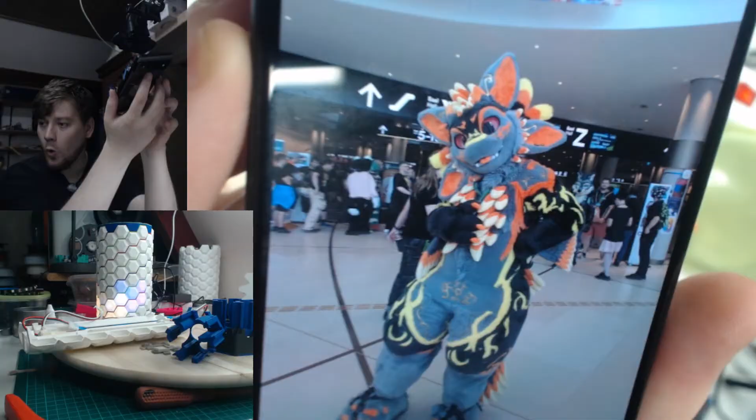But yeah, that was my Thursday, and Friday, Saturday, Sunday I was finalizing the build guide of the lamp and setting all that up. And insanity.

Just the insanity of doing all the things at the same time. I kind of realized that I needed to make a double check on all the files and all the models to check if everything is correct. And I almost re-uploaded it with the technical drawing timeline not fully drawn, so I missed a couple updates and I almost uploaded it in a bad state, and I spotted that. I was like, oh shit.

If I didn't do that change, there was a high chance that people could actually slice their fingers on the model, like I did myself. Parts were really sharp. I fixed it, but I didn't move the timeline from the CAD, so that update didn't apply yet. So I almost uploaded the model of the lamp in a sharp version that can really cut your skin.

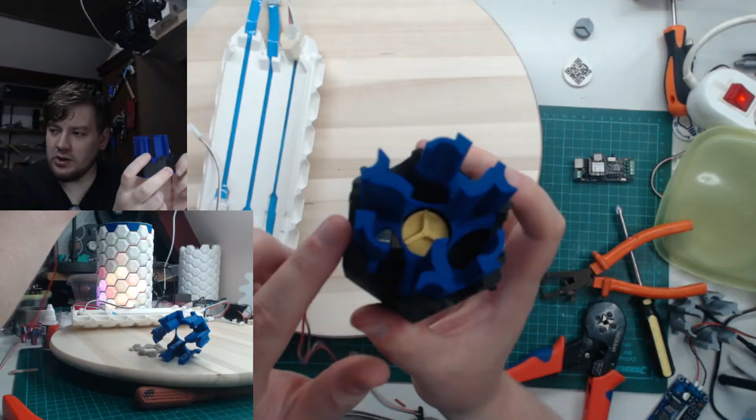I really want to work out, so the lamp probably gets some small adjustments and fine-tuning of the pictures for the stores. But I really want to fix this one, because the marble can still jam itself stuck, and I'm not fully happy about that. So how can I fix this? I'm not sure yet. The marble can jam in, and that's the part I'm still trying to figure out.

I went to Hamburg, to Eurofurence, I still don't know how to say it, and I met some really cool people, another set of crafting people there who have the knowledge I lack to make that thing. I think I'm going to try to make a furry glove with RGB LEDs in it, but first experience how to sew, how to take the steps of actually crafting, how can we combine fur with electronics. I know the guy I just showed did it, I know other people did it, but how can I make it in a way that is washable?

Because his glove cannot be washed anymore, the electronics and the fur are completely combined with each other. So I want to figure out a way, can I combine the first skin of the glove, get the electronics inside so I can just wash the fur, fully deep wash it to clean it up, and then technically skin it back on the glove. Those are not beginner skills. The things I want to do are not for a beginner, and I'm very much a beginner in that skill.

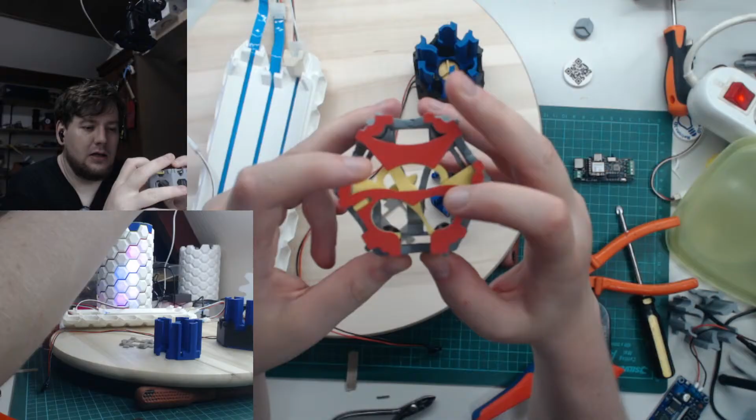Okay, this is an old version, so this one still gets stuck because this small tip was too big. So the marble, if it is centered up, do we have a marble here? Yeah, I have a marble here. So sometimes when you have two marbles in a chain, this one goes so fast that the first marble is locked in here, and then the second marble is stuck at the top.

And when this happens, now it doesn't work, because I've seen many times where two marbles get stuck and then you have a full jam, or it's so precise in the center that it jams up in here. I still need to fix this before I can fully publish

the marble contraption in this design. I'm still happy with it. I think I can put the base pieces live easily and people can have fun with it, but I'm still trying to find a couple tweaks.

Because one, it's very hard to see, so possibly this here. This has just slightly, it's slightly bouncy, because this plastic here is just slightly too thin. So can I make it thicker without it interrupting the dropping? That's the thing I kind of need to puzzle out in the next days.

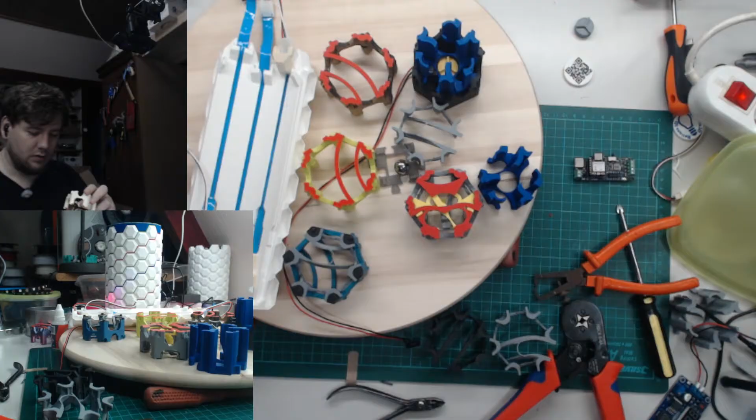So with the stopper you prevent the marble from going on top, so it stops in the highest position instead of launching off. The marble gets stopped in that area and drops straight down. So that's why there is that small stopping piece. And this works pretty good.

And I made it good enough that even when you have this one here, so you made, let's see, that one, yeah, that one is also okay, so this one should be like that, and we found that out.

Because even while this one is in here, the straight piece can still be used, the corner pieces can still be used, so that still all works. So that's the cool part of doing all that. So this piece doesn't really interrupt the flow.

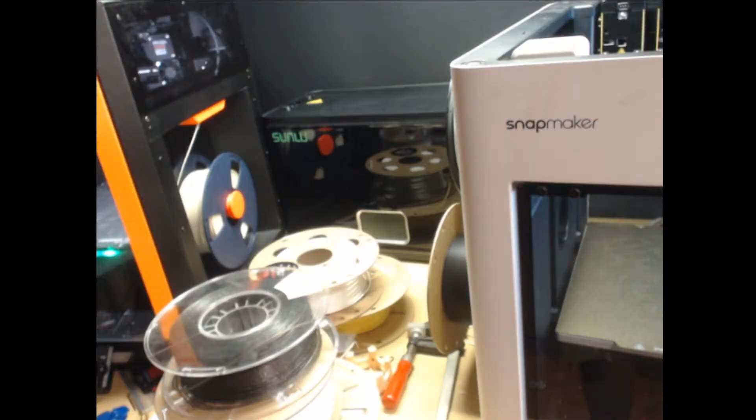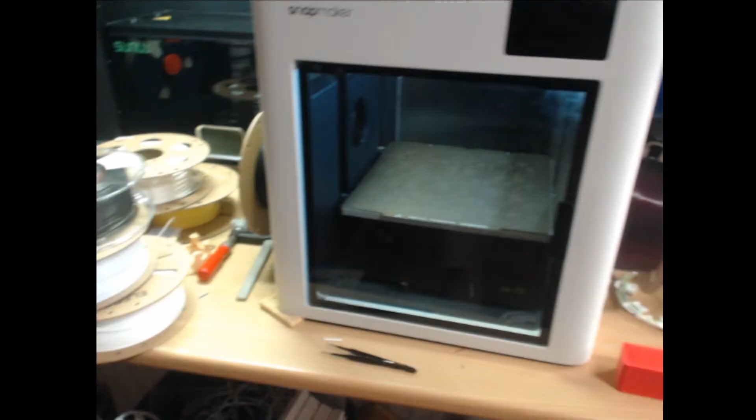I want to build that in 3 months, but budget wise, if the Lampic sells in a couple weeks 50 pieces, I can do the crafting of the fursuit, learning how to sew, all that directly, because then I can buy some equipment to actually start with all that. But oh boy, these are all very new skills, and I'm slightly scared. I'm really nervous for it.

But it's also a very exciting part, because if I can combine all that, I can combine it with 3D printing, I can combine it with electronics, I can combine it with RGB LEDs, and hopefully that's gonna look so badass. I have some ideas in my mind that I think are gonna work, but it needs physical testing and smaller chunks of the idea, breaking it down and doing all that. But if that is gonna work, it's gonna be so bloody awesome. They have stretchy fur, and I want to use that for the project and mechanical engineering.

Probably with the fursuits you need gluing and you need sewing. But I'm gonna try my best to not glue. Again, I am not willing to glue.

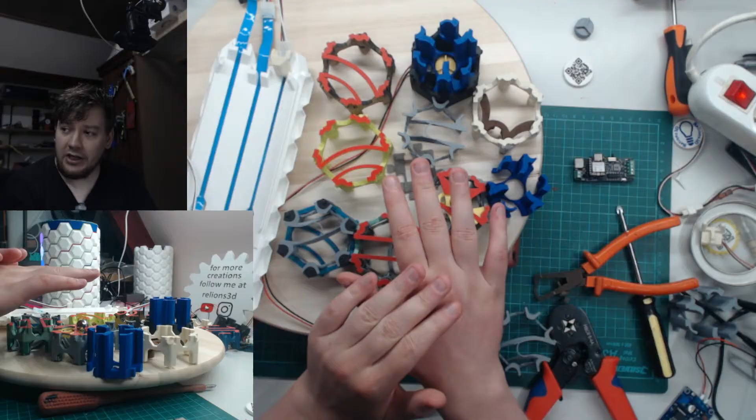So the idea is, if I can put my hand in the paw, in the glove - let's say glove, because paw still feels weird for me to say, and I don't pronounce paw that good, that everyone understands it - so if I want to make my glove, I need to make one layer where the electronics go in. Then I need to make another layer which I can put the fur on. If I can 3D print those two layers, I can click them on, that is fine, because then I can separate the fur part and actually properly clean it.

Fursuits get dirty, you need to clean that, and with electronics that's a very risky thing. So if it goes kablooey, I need to separate it anyway. So why not start with a design where the electronics is its own layer and the skin on top is another layer that can be detached from each other.

So there are a couple ways. Have a 3D printed base where the electronics lie in, and then a small 3D printed layer around it that I can just put on with TPU, and hopefully Tech foaming TPU, which is a little bit more stretchy, hopefully. But I need to test that.

Or the fabric, the fur, is just on itself, completely sewed together, and then technically you glue it on. But what if we don't glue it and use magnets? And use small 3D printed clips that I can put the fur on, click it on with a couple magnets in places so it is decently in place, locks in place, and then I can still separate it.

So if I can do that, which is gonna take some time and a lot of experience building up and skill issues, because I don't know what I'm doing, I just have the idea in my mind, I technically don't have to glue. At least that part. I probably need to glue a couple parts together because that is probably needed.

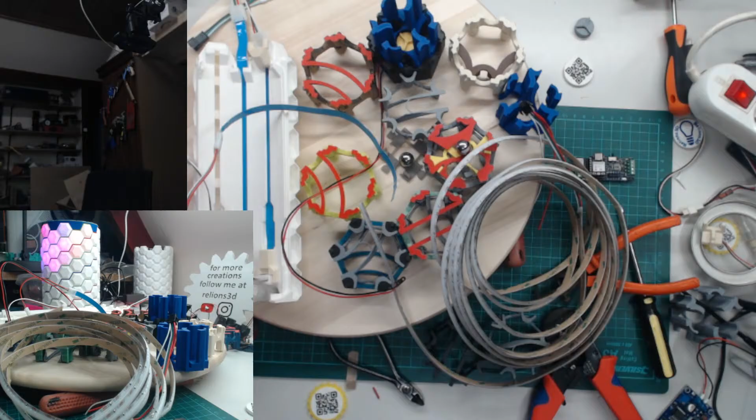This was the very first lamp, the very first design lamp that I made in this concept. This one has pogo pins on it, and as you can see on the bottom, it's all separately soldered. This is not fun, but let me try to do that. Can I put some light into it so people can actually see it? Can I put it here?

And this is just pogo pin hell, all connected up. I should not have done it in the back. I should not have done that.

This is where it started, the very first one is this one. And as you can see, it's a huge difference. This is the first one I made for someone who asked, hey, can you make me a hexagon lamp? Because I don't want to do it myself and gluing it on. And then I made this one - the camera cannot pick it up, it's already bloody dirty and the quality was not great and had infill problems. Then I designed this shape, and this one already, as you can see, it looks so much cleaner than the version one.

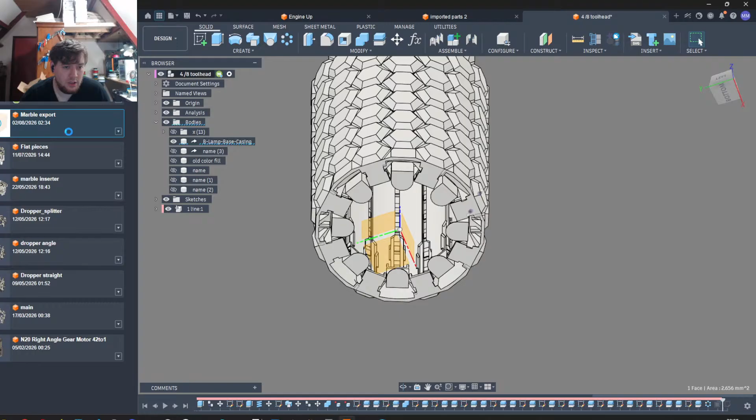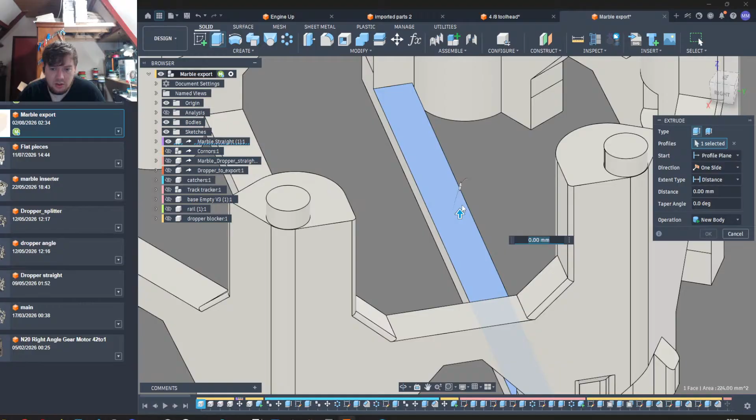But let's go to dropper, main, marble assemble, marble export, because I want to change something here. And that's the tracker, base empty, doesn't need it. So can I make it a little bit stronger? So can I, because if I do this, I just make it thicker, and that's not what I want.

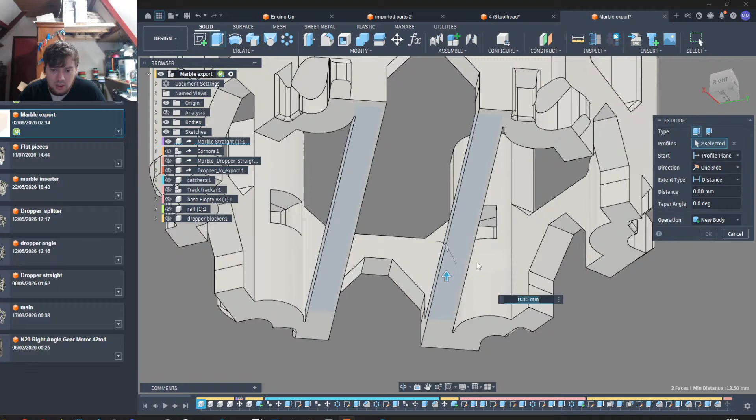But this is not what you want either. So if I say, what is the total value? So this is, no, this one and this one. How thick is this? So if we go plus 2, plus 2, we're gonna make it twice as thick, but we're gonna do 2 small chamfers because we don't want to go straight, we're gonna go angled. So hopefully that small ridge of edge of plastic, like that, do not want to have sharp. So 1.6 because I want a 0.4 line here, 0.8, so this is 2 lines of plastic. And I think this will work.

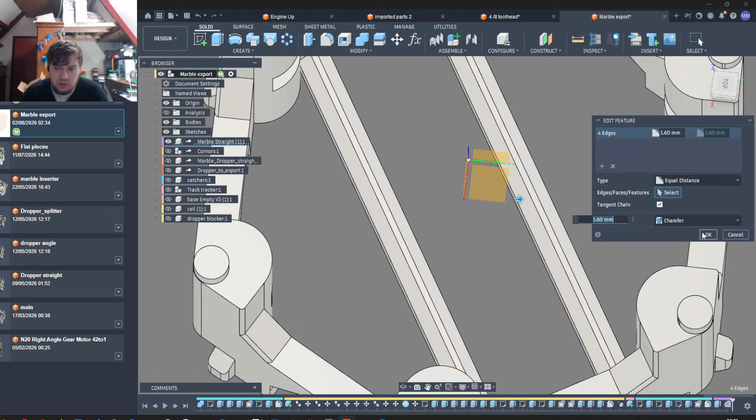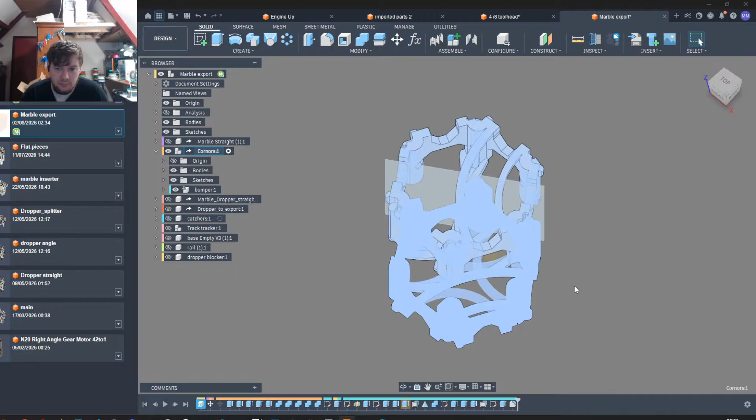So hopefully I can make it strong enough that the piece doesn't go flat down. And this angle should not hit the marble when it goes down. So I want to print this one and I'm gonna add a corner piece. So let's remove this one. A couple are flat now, that is not good. This is bumper, okay, there.

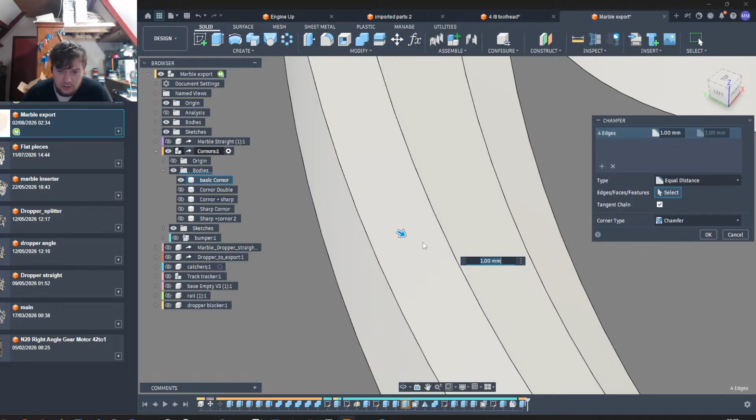2 up, so we create a little bit more thickness. And chamfer it down to 1.8 or 1.6. I forgot that, so let's see. I think it was 1.6. So... We have a slight problem here. What is going on here? Something is not correct. Huh?

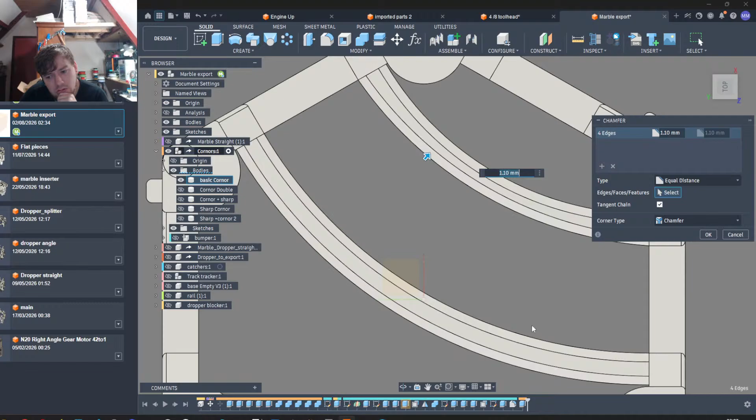This one is correct, this one isn't. I made a mistake. Oh, I made a design mistake. Okay. Yeah. Yeah, oh crap, okay, is this the only one or...

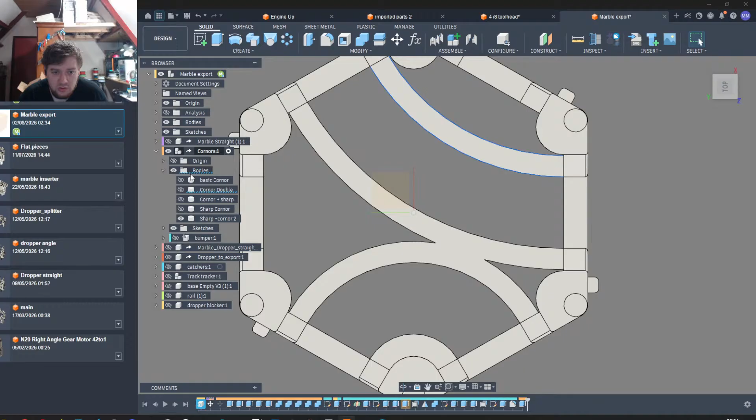Okay, this looks okay, so this is 4 and 4. So if the radius is 4, this is also 4, so this one is fine. Corner sharp, this is fine, this looks fine, this is all fine. Yes, sharp corner, this is also fine, sharp corner too. This looks fine, so it's literally the basic corner.

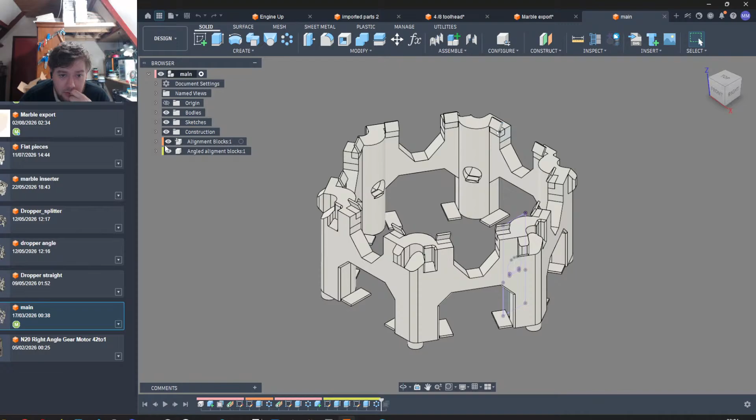Oh boy. Oh boy. Nope, not this one. Dropper angle, dropper splitter, marble splitters, flat pieces. Should be hidden here, so now we're going back because I have an export file while I do final tweaks, and I have main bodies in different files so it doesn't overload. So I already see this mistake here, and we somehow...

Okay, so both are the mistakes here. Corners, bodies, basic corner. So let's go into this file and see where we made this. So I tried to do something here for a thicker thing, so that should be... Bumper should be gone, that is bumper.

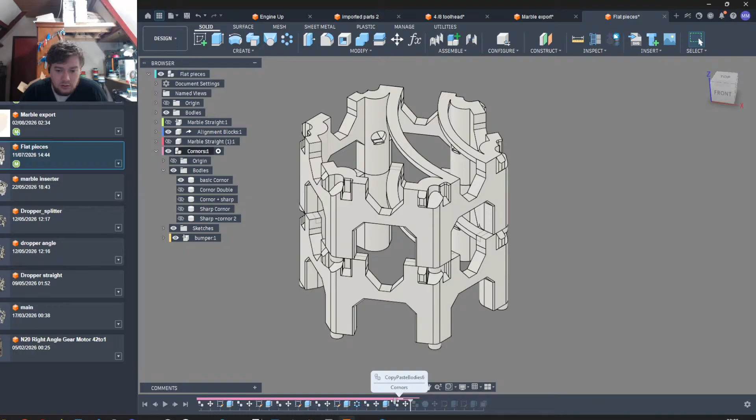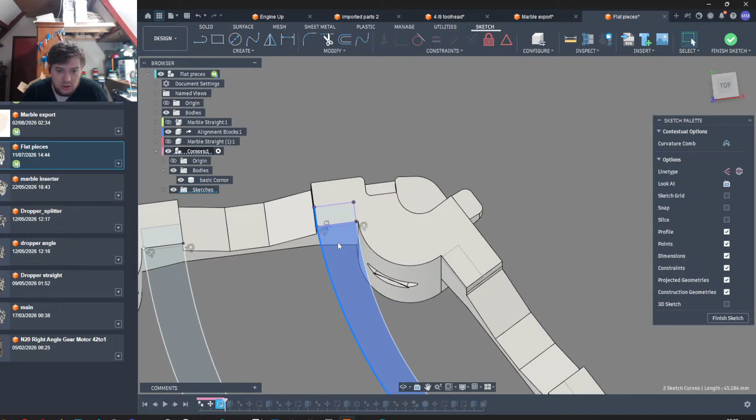Okay, we still have the mistake here, so now we just can keep going and going. There we go, okay, now we found the sketch. Now we do this, that is that one, and this one is not correct. And this one should be.

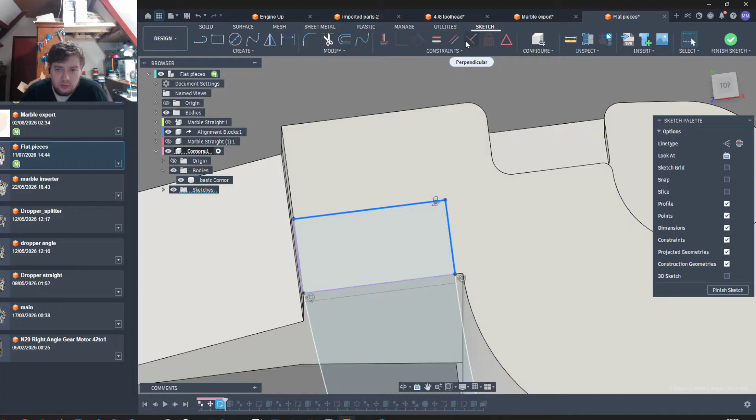But why is this and this not correct? Nope, that is also correct. This one and this one is correct. Why are you not correct, huh?

Which one is it? Because, like, I'm gonna remove you and see how you react without you.

I think that's the fix. Found the fix, oh thank God. I do my best to put everything now in separate components so you have a small timeline so you can actually see where your problem is. So now we can all extend it to here.

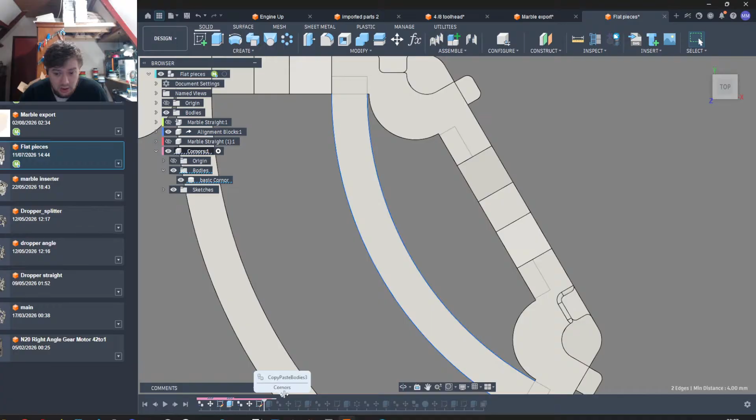Hit save here, it's saved. Now it's uploading the progress. It'll take some time, come on, you can do it, Fusion. Upload it and then give it to me. Come on, there we go. Now we go here and now I click here.

Components out of date, so I now click update. And then we should see this updating. Now it's calculating, calculating, calculating, doing all the actions again. And then this, bloop. Hey, we fixed the model, and maybe.

I never noticed that, I have printed so many mistakes. Oh bloody hell! All my single colors, all my single corners are not correctly printed.

Oh, that gets me so salty. They work, but that's why the marble was not correct. That's why.

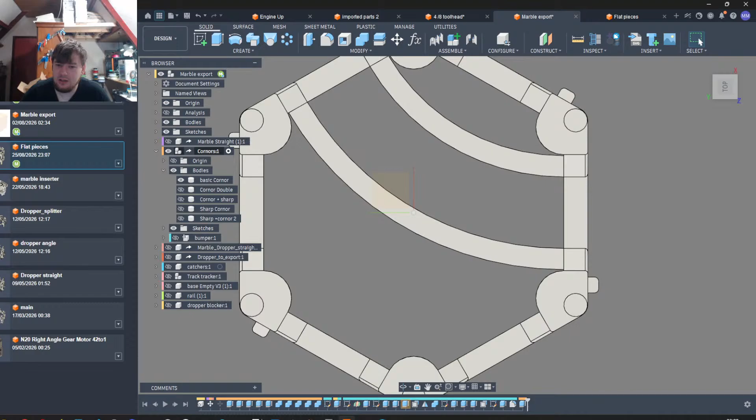No, I fixed it properly this time, so not fixing it and doing it later, but in the actual timeline, so everything else that touches it is updated.

Oh, I feel so salty about that. Oh, I feel really salty about that. Ow, ouch. I have printed around 400 corners, like probably 200 corners just like this one, so I printed 400 of these pieces, all wrong, and I never noticed.

Now I look at it and I see it directly, but I never noticed. That really affects why the marble is getting stuck. So this is like, I have seen the marble getting stuck so many times. I have seen it and never actually realized it.

It always gets stuck here because there is more space in the center, so it doesn't matter where you go, it will center up. In an actual double corner, if I have one, I'm like, yeah, this one is bad, this one is bad. And with the double corner, I didn't do that.

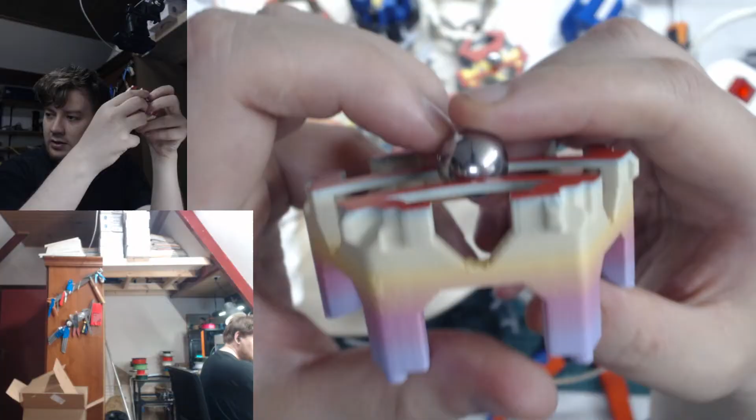So this one just keeps going and just stops where it stops. But the moment I do that here, it literally stops here because the ball needs more energy to actually roll up again, because it's slowly going down. That's why everything is stopping.

Oh, I'm so bloody pissed. I am... Oh, this is such a disappointment. I am pretty mad at myself that I have not actually seen it once. I have not actually seen it once. I have not ever seen this once. Well, I have seen the marble getting stuck, seen the marble getting slowed up, and I couldn't puzzle out why, because I just didn't realize that this small piece was slightly smaller.

And this is why I triple check.

Hey Mega Ape Lord, I have not seen you yet. Did we meet at one of the events?

And lurking is appreciated. Like, I'm just realizing that this piece is wrong. I've printed 400 of these pieces, 400 corners that are now technically never working.

Yeah, that haha is completely, yeah. Oh, I feel so silly. I feel really silly about this, but welcome to testing.

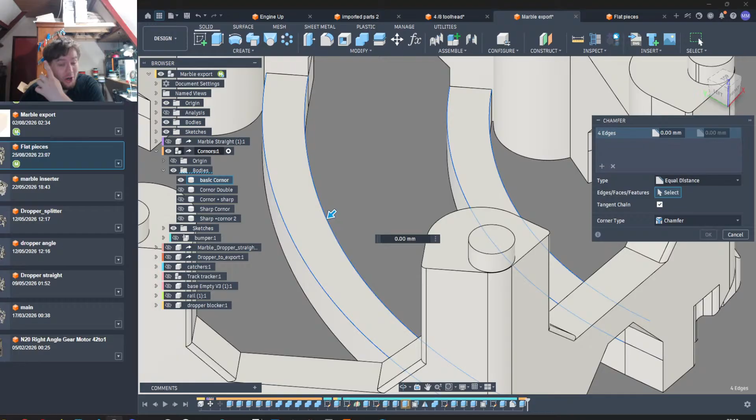So I'm reinforcing my marble contraption, and I need to switch camera. There we go, I forgot to switch my camera. I do that so many times. Sorry. Alright, so this whole jam started because, like,

I saw that this was not lining up. It was not how it looks like this. It was being slightly curved, and this was just disappearing because the edges were not the same.

We found the problem. We went back in the timeline, we went fixing it where it should be fixed and not fixing it right now, but keeping the fix in the timeline. Welcome to CAD programming or CAD designing. You can fix it in the past and then update it to the whole timeline, so everything else is quality approved.

Oh man, I'm so sad that I just now found that out. Printing 400 corners, printing 400 corners.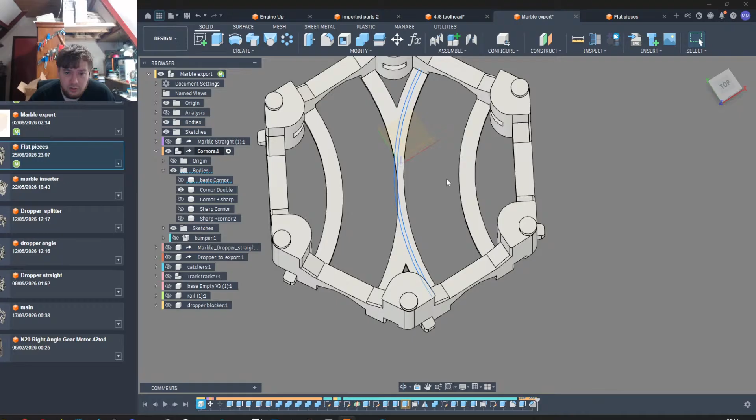Oh, that still hurts. Okay, so we have the basic corner now. We have corner double, and this one's gonna be a little bit more spicy because of the center one.

We're first gonna do those two. Let's see how we can do this. So press pull 2 up, and do not want to do that one yet.

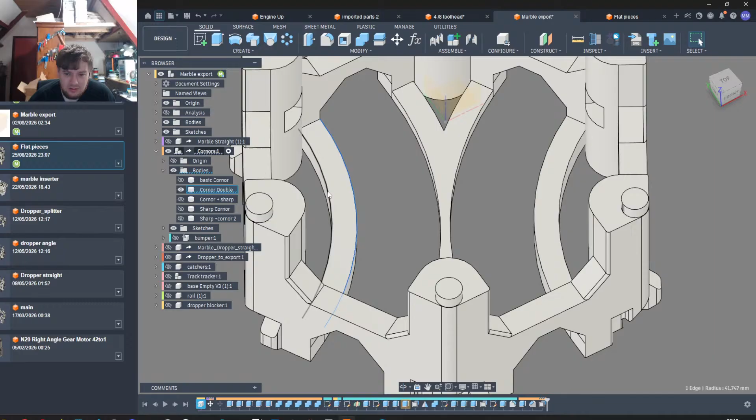So let's first get the basic pieces out, do a chamfer. Go to 1.6 because then this edge is 2 lines of 0.8.

But how do we do this one? Because if I do just 2 up and then I do chamfer, this is gonna look very weird.

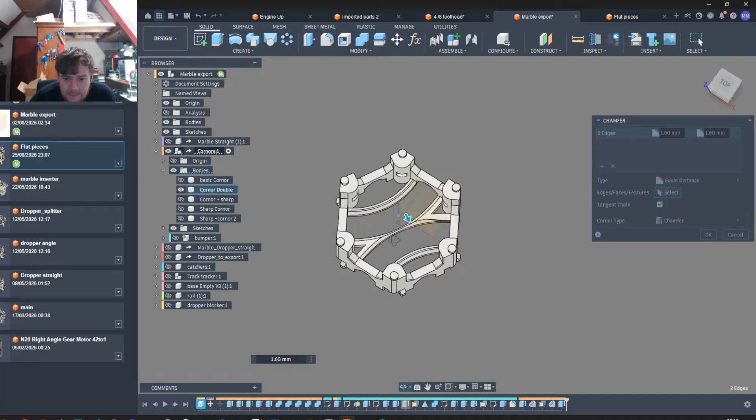And yeah, there we go. Why are you not correct? We have a small tiny edge here because I can see that this is blue, but at the same time, yeah, about that.

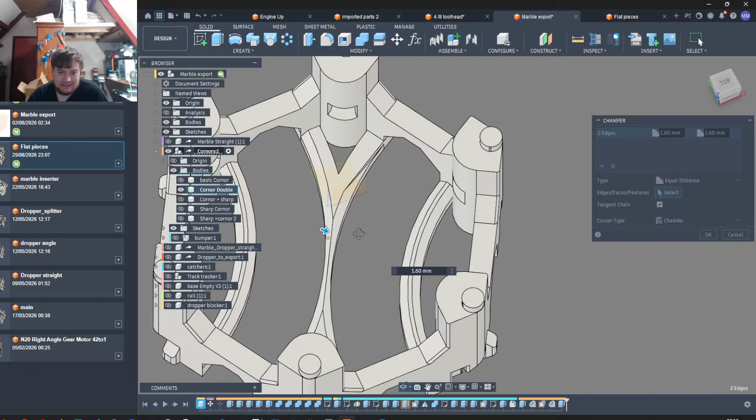How can we properly make this a little bit higher but not get this problem? Because I dislike doing this, I also dislike doing this. So let's go down again.

Let's make a sketch where we're just gonna remove the center and see if we can make it in a better way.

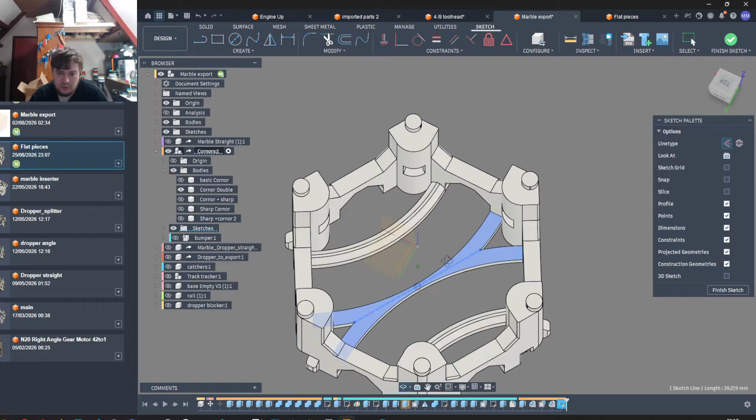How can we do that? Okay, first get a line all the way to the center, to the other side, so we have a 100% lined up piece. Then we just do this one, and then we perpendicular line it up with this.

Then we say we're gonna constrain this one to here and this one to here, so now we can drag it and it's always centered.

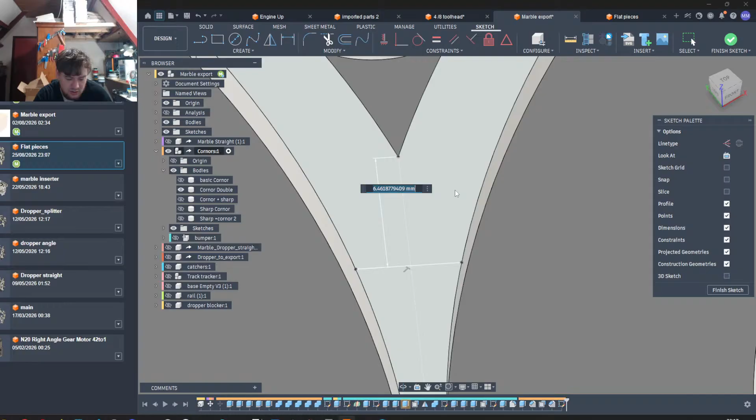Then we grab this distance and I'm gonna say 6.5 for now. Oh, that's not that. 6.5, not 65, that's way too long. So let's see if this works.

Let's create a center point so we can actually mirror this line, and hopefully that goes correctly, because mirroring this kind of stuff always goes wrong. So let's see if we can break it.

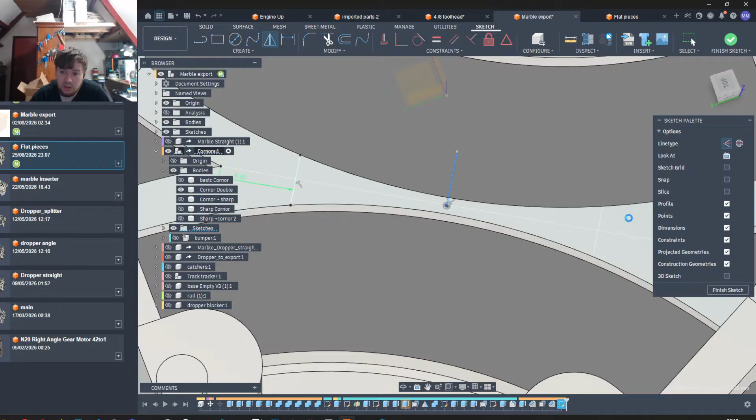So this one goes here, and oh, this one goes nice. All right.

Now we go up by 2, and let's see if these mistakes happen again. See, and now it goes correct. Okay, now it goes correct.

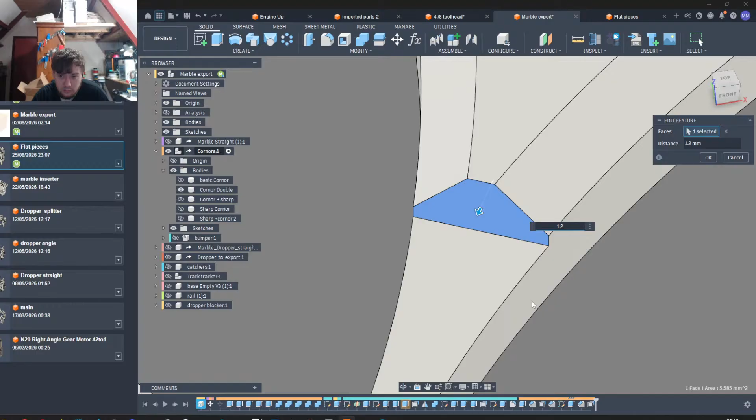And then 1.6, and 1.6. And now we can press pull this a little bit more, 1 millimeter, so this should be 0.8. A little bit more, 1.2. Yeah, okay, so that press pull is fine.

And this one should be 1.2, so that gets you close to 0.8, which means 2 plastic lines - 1 plastic line goes on the outside and then 1 on the inside, so you don't get a weird infill there.

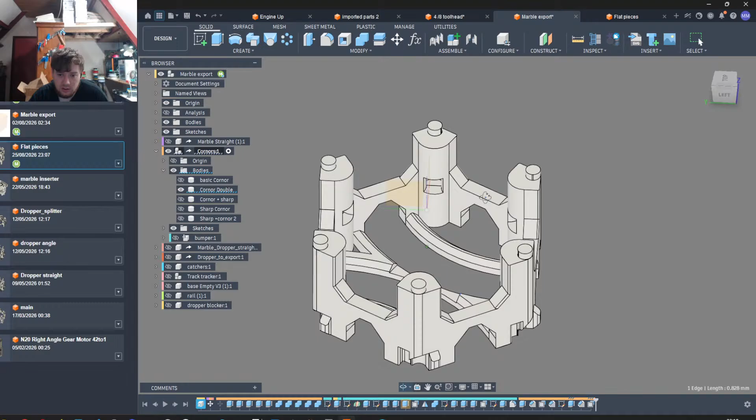And I think this is decently reinforced, a lot better than before, so it is less bulgy. I'm sad that this looks like this, I kind of want to close it off, but yeah, how do we do that?

Claude, can you not update yourself while I'm streaming? Thank you, that was silly. You are being silly, silly AI. Can you not do that? Thank you.

Oh yeah, okay, so can we make this a little bit cleaner? Because if I do press pull more, it just goes down like this, and yeah, this is not what you want. Can I do a chamfer here?

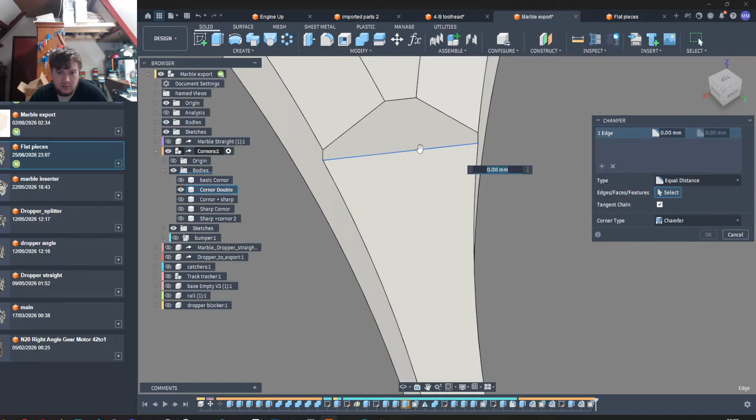And then just do that, yeah, I can work with that one. Then I can make it a little bit farther. So if we go to 2 distances and just try to stretch this one out a little bit farther so the lining goes better.

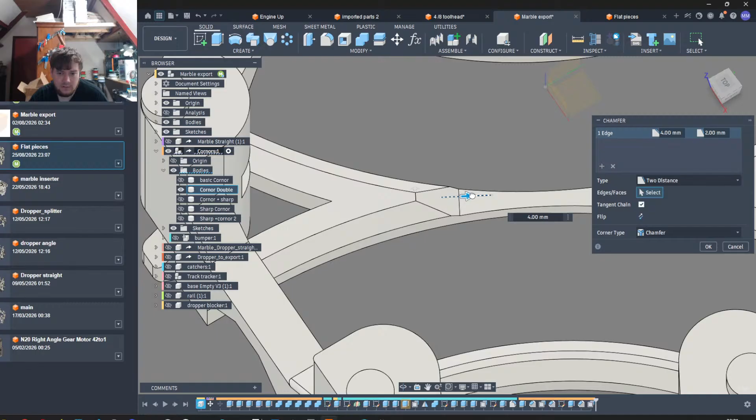Okay, I think this feels good. So this feels a little bit stronger, it extends the bridging a little bit more, so you get that point of getting the support in. And I think visually it still looks decent, yeah okay, this looks better.

So yeah, okay, I'm gonna try this one. Let's go to corner sharp now. This is gonna be not a problem, and this is fixable. All right, so first do the easy one.

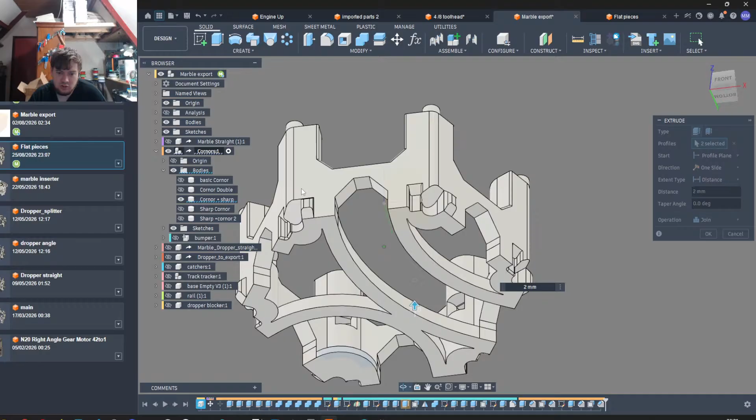Let's do it step by step, let's go 2 up. I think this one goes at the same time. Yes, this one is not needed because this is already strong enough. Let's just add more strength, just add more strength, just so it never can falter.

This one is really hard, so that should be fine, right? Yeah, it should be fine. Okay, that one.

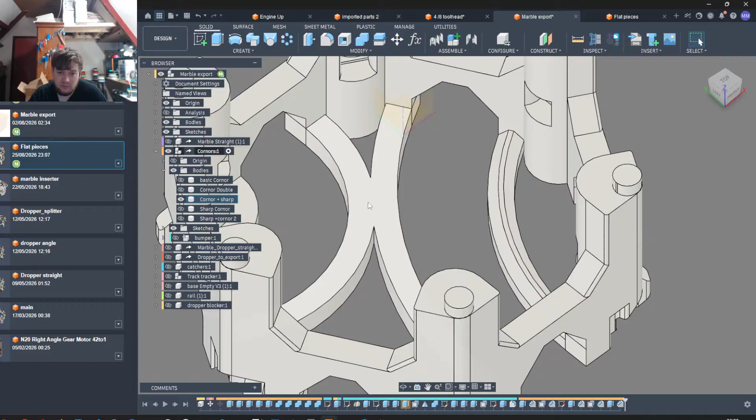Okay, and I need specifically this one. So this one and this one are also needed, and then it doesn't work. We need to check that one carefully separated, so let's do this one first and then see what happens.

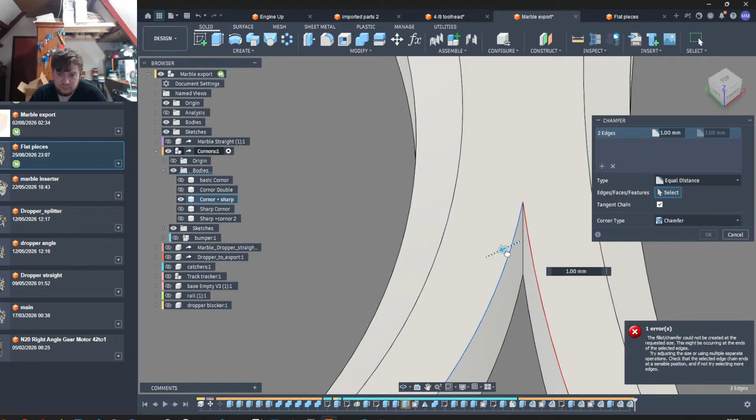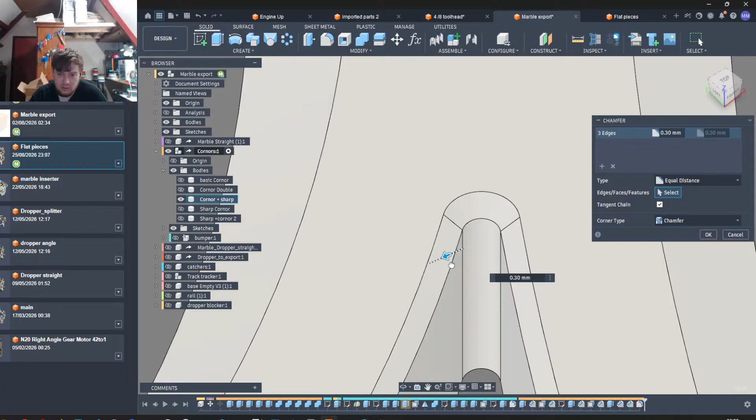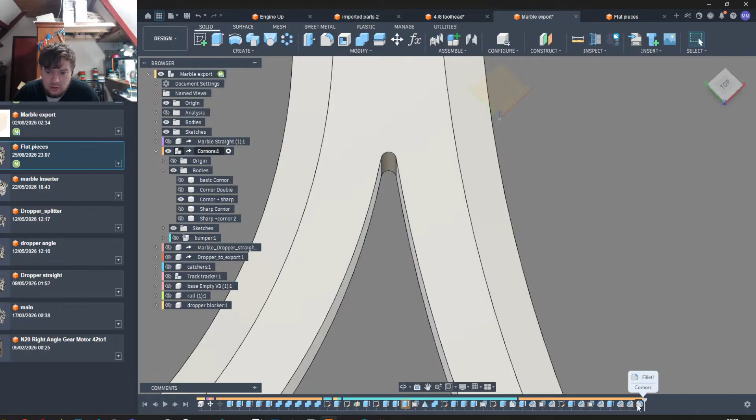Okay, let's see how small we can. Huh? Wait, I did chamfer. Why didn't it do the chamfer? Okay, that was weird.

Okay, do I want to accept this? Yeah, I need to accept this. So this chamfer is a fillet of 0.25 because we have this one now.

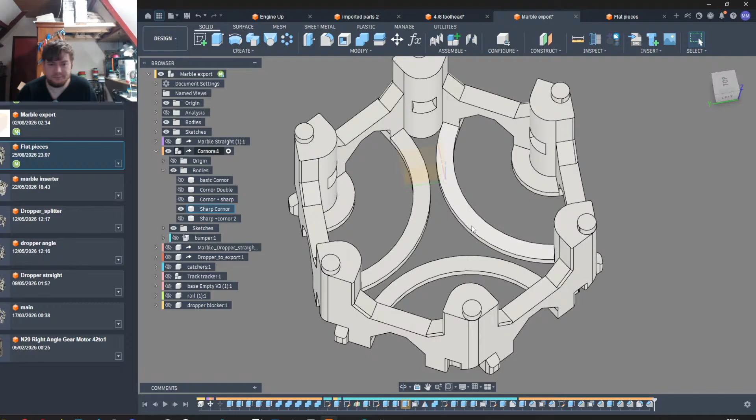That's gonna hopefully look cool, but at the same time... okay, now we need to do this one. So that is this, and this. Go up by 2, let's bring up those two. I do this specifically for the bridging itself, and I can make this one as thick as this now, because there's no way, like, I make the edge so it can drop, but there is no dropper here.

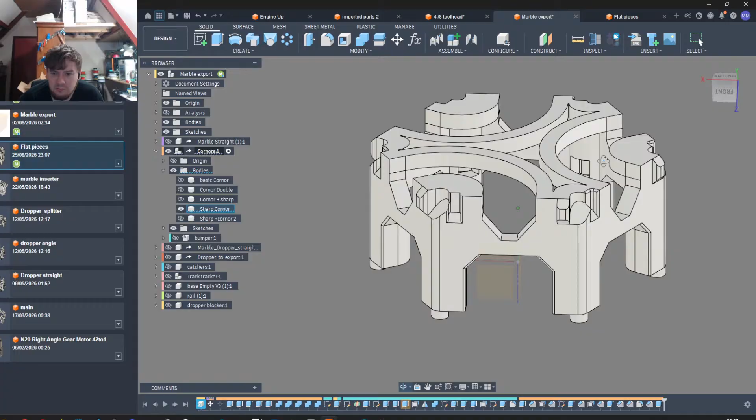But at the same time, making it look different feels weird, so I prefer to do just the chamfer so it all looks the same. Well, the purpose of this chamfer is that the marble can go under it. This piece doesn't have a dropper capability.

Oh boy. But it still consistently looks the same. Do I really need to do this then too? What do you guys think? Do I need to make the outsides also like this? I think I need to do this. This looks better, yeah, then everything is consistent. And everything is consistent, so we have all those pieces.

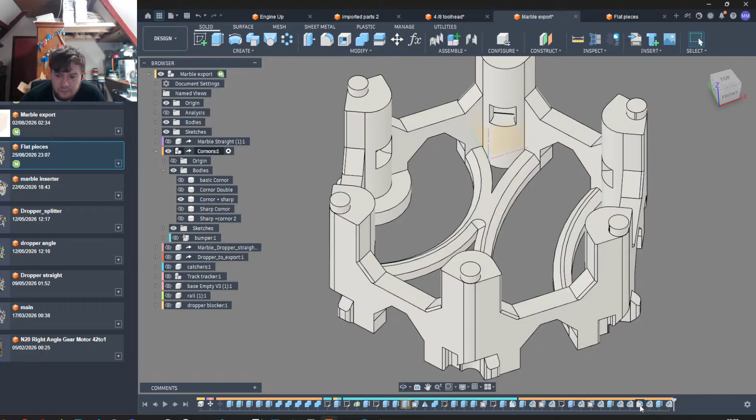So let's go back to that one. Make things look consistent. Do I need to do that one too? Yeah.

This one is for strength. This one is needed because the marble can go down here, so I think this makes the pieces a lot stronger, and that's the good goal that happens, because I see there is some small wiggle, and even with this double structure, it can still slowly bend a little bit. So hopefully with a couple edges more, so 2 millimeters, so that is...

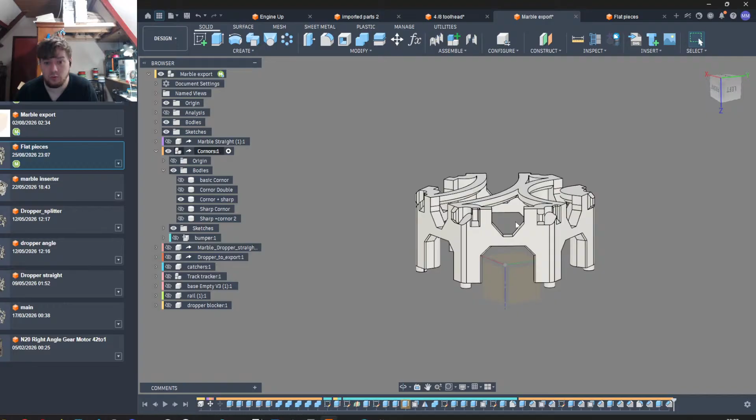5. It is 10 extra layers, so hopefully with the 10 extra layers there's enough strength that it never even slightly bounces down. So hopefully it works. Gotta make some test prints, so when this one is done, this one is left.

So now we're gonna do this one again. Let's go here, you fillet. 0, 0, 2, 5. And let's go to the bottom, do 2 extrudes again, let's go down that.

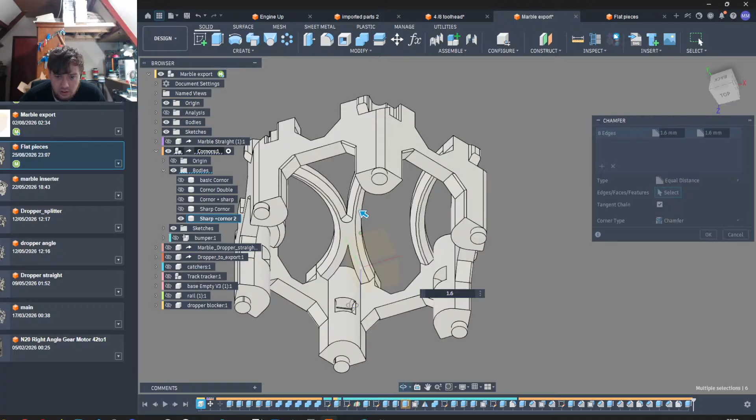And let's grab them. Chamfer, chamfer, chamfer, chamfer, and chamfer, and chamfer. So 1.6. And all that now looks the same. Nice. Do not forget a corner. I'm not forgetting a corner.

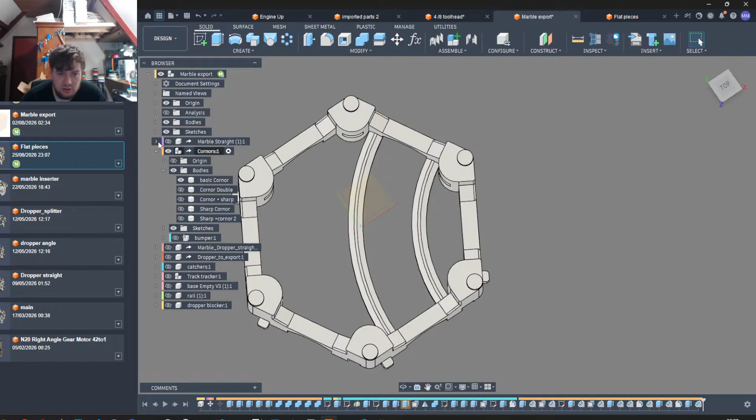Alright, so double check, is this one okay? Yes, yes, this one is okay. Yes, this one is okay. Yes, this one is okay. Yes. Alright, then there's all the pieces. We have the basic corner and we also have the straight. So let's get straight and body up here too.

Save mesh. Now we're gonna not print it in the Bambu Lab. I do not want to do it in the Bambu Lab, so let's go to testing because this is a lot easier. So save, save, basic corner, save them all separately. Yep.

Okay, now I'm gonna do it like this, so everything is lined up, everything is lined up. I only have that open. Let's just do an export, way easier. Export. Testing, marble export, new flat pieces. Export.

Do I have enough plastic on the core 1? I kind of want to print it on the U1, so let's make some blue ones. Yeah, we're going for blue. I want to do it on the U1, so let's move it up to the U1. That's a lot easier because that's where I have all the quality, since the core 1 has trouble with this system here, so I need to debug that one. So let's go to the U1 slicer.

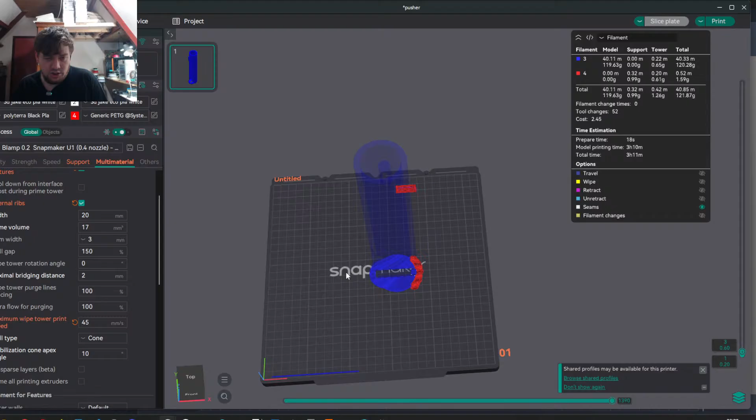I need to go to this one. Prepare and supports, disable supports, lamp settings, that is fine. Okay, cool, you are gone. Let's get to testing.

Let's do that. Yeah, okay, cool. Split them all up, there we go. Okay, let's do a slice and see how it looks. Let's see how this looks.

Oh, okay, now I think my sugar is crashing down. No, still not, oh bloody hell. Okay, so this is slightly higher than expected, but this line looks better. Slightly sad about this one, but cannot help it. I'm slightly annoyed that this doesn't work like it should work anymore.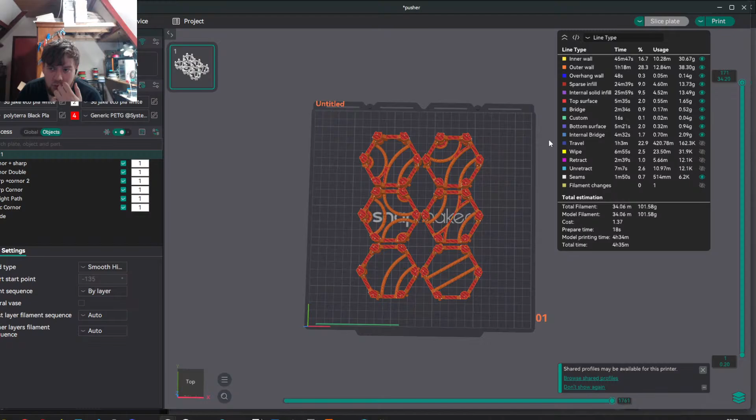Okay, I want to test something. Let's put you on a separate plate and do one solo slice. This should be 45 minutes. Okay, it adds 1 minute. I cannot complain.

Oh, I'm making a very big mistake here. Oh, ouch, oh, I cannot do this. Oh, I did not realize that one. Oh, whoa, whoa, whoa, whoa.

Where is it? Crap. Alright, I think it is downstairs, it's probably downstairs. Okay, I need to grab that, because if this doesn't work, I need to grab the tool, so give me a moment to find it. I need to find that tool. Oh, crap.

I almost made a mistake. I'm gonna go robotic, I don't care. Blah, blah, blah, blah. Where's the tool? Where's the tool? There's the tool.

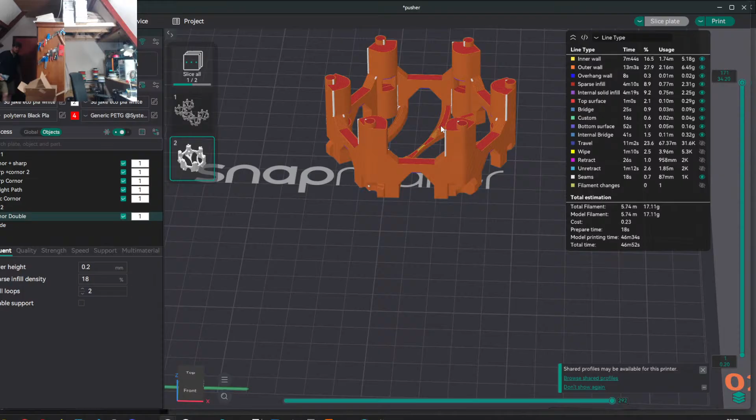Alright. Voice is slowly coming back and the robot quality is gone. Alright, so let's see which mistake I almost made.

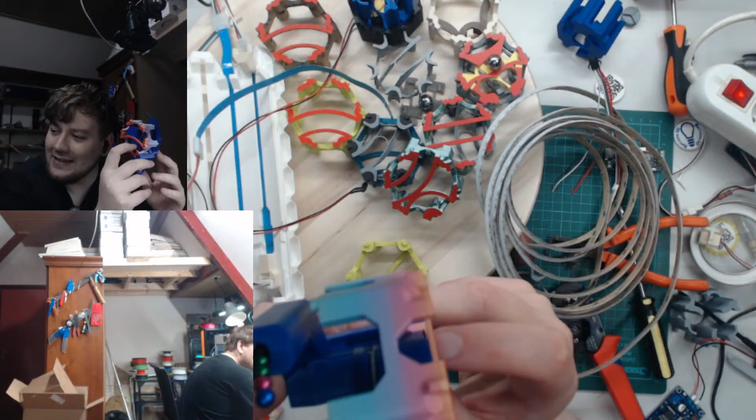Like, because here's the thing. This tool you insert in here. I'm pretty sure that this space, oh, come on.

Yeah, like it. Focus. But yeah, that space is a lot smaller than 2 millimeters. So if I printed those pieces...

This doesn't work anymore. Can I make this slightly smaller? Yeah, I think I can make this one slightly smaller. Okay, this needs slightly more work, so I need to redesign this one too, so that it fits on the new design. So, glad I thought about that.

So I will start the print anyway, and test if the thickness feels better for rigidity of the marble, so it doesn't slip down and is more rigid, and doesn't do the things I don't want it to do. If that works, that's the new version.

I need to adjust this one, because if I forget to adjust this, then people pay 15 euros for this and then it doesn't work on the new design. I almost forgot that, like I didn't think about that one, huh?

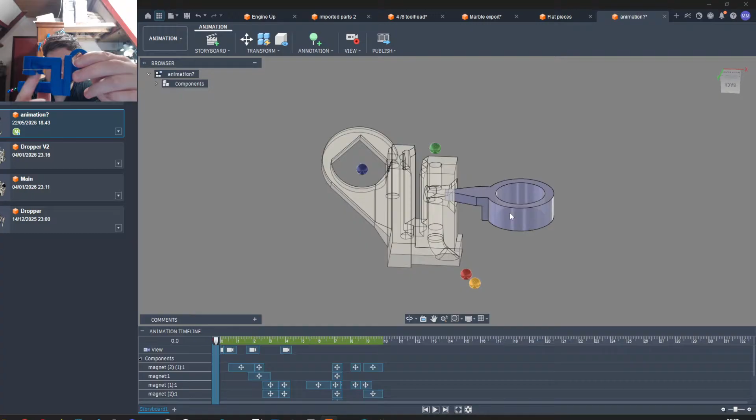So the moment that happens, you see that this magnet here is inserted, the green one is inserted, and this is the canister line. So the moment this happens, you push the piece in, you click it in.

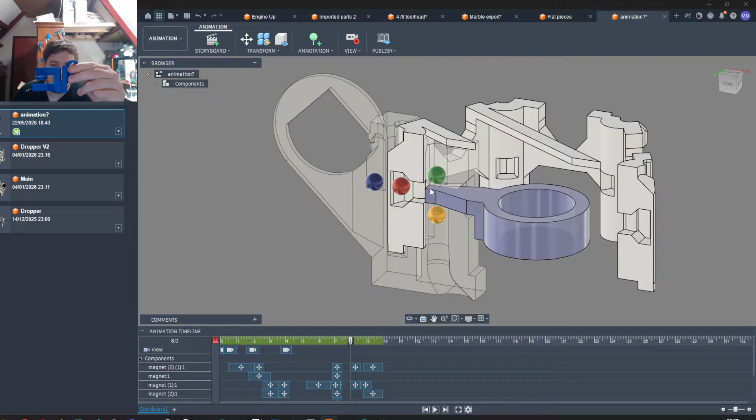This magnet holds in place so it never comes back. Going back to the design and checking here really fast, let's do an inspect. You see in section analysis that this is slightly smaller than the marble, so the marble pushes through because you push it in with the tool. Then this small plastic just goes a little bit wider and pops back.

So that's why the magnet stays in place. But by doing that, and doing this small magnet here - a lot of people see this magnet here - this holds the chain. The moment you release it, the next marble pops into place so you can do the pushing again. This magnet guarantees that this one never gets attracted to the green or the yellow one.

That's the things I came up with, because I noticed that sometimes you get a jam, and then the marble, when you want to push it out, is stuck here. And then you can never get it out because it's all locked in place, because these two keep the magnet here, and then you need to wiggle it down in half, and you cannot push this one in because you moved this and now it's stuck because this one is higher. That's why I designed it with 3 extra magnets. But all the magnets are the same, so the only thing you need for this system is a small elastic band.

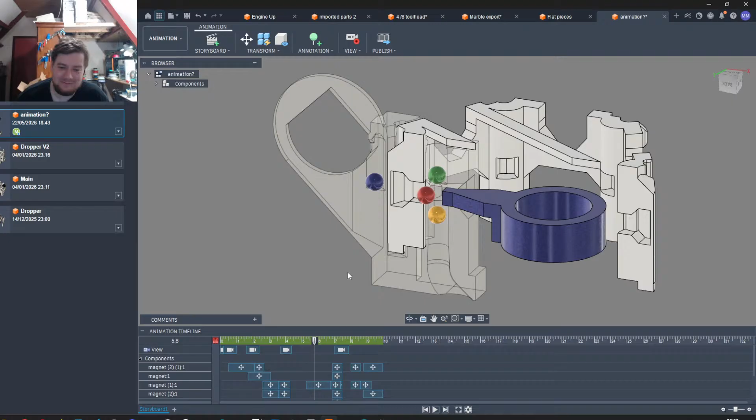That's small technical stuff that I like, but this one is really hard to show on events because someone explained, like, how can you do this? Can you give me one? And I was searching for an empty one, I couldn't, and he just couldn't see because there's a small magnet in here - it's really hard to see, I cannot even see my own camera. So that small piece there is where you click it in, and then this one gets clicked in. This one is very easy to spot.

That makes it so you can keep loading, so you can always get the magnet in here and do that effect. And then it just keeps going because the weight of these magnets, they just fall down and do that. And now it's stuck - there was no piece in here. There we go, putting it back.

So it's decently easy to reset, but this is 15 euros or $15 in value cost, because I put a lot of time into this one too. But at the same time, there is a free one that is fully manual, while this one is more automatic and lined up for a bigger canister.

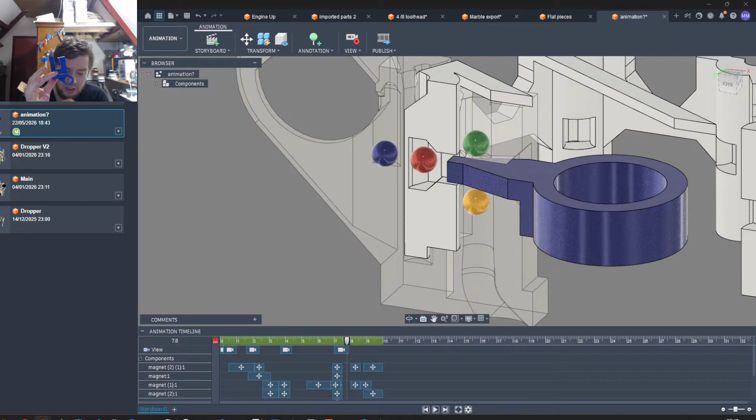Design details - why I do things and take the steps to understand I want to do things slightly better, and I just do not want to trash it away, sell it, or put it live with half effort. That's why things take me a little bit longer, because I really do my best to make a product that works out of the box better than... how can you say that... okay, I want to make my products better than a game on launch date, because as you can see, current games in this age are all just beta versions. We buy the games, then we test it, then we complain, and then they maybe fix it. Because if we don't complain, the game company doesn't want to fix it, because why fix something no one is complaining about?

That's why you get so many bad games - part of it. There are other reasons too: everything is rushed, and all the investors are complaining because they want more money, and every game company needs to extract money from us gamers. But a core part of it is that as long as no one is complaining, why bring out a good game? That's a mindset I disagree with. I want to give a good product, doesn't matter if it is good or bad - I want my thing to be my standard. That's what I want to try.

Yay! Oh man, I get so easily distracted the last few days. I'm slightly tired, guys - only slightly tired. But let's put this one back.

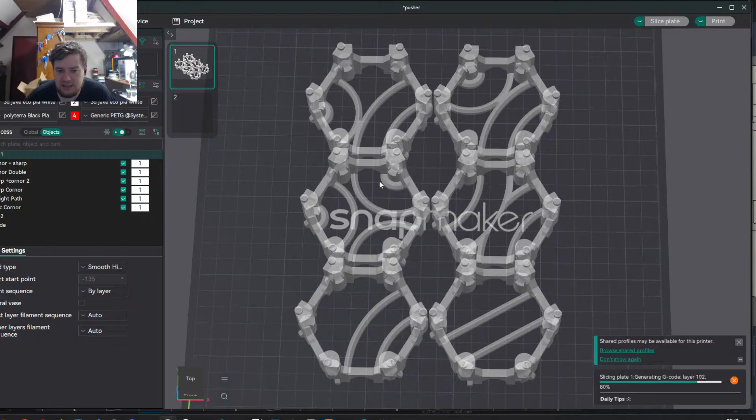You know what, I'm being smug about it, but that's not good, to be honest. No wait, this is good, because I made a video that is shorter than one print of this. So on the video side that is good, but on the printing side this is bad.

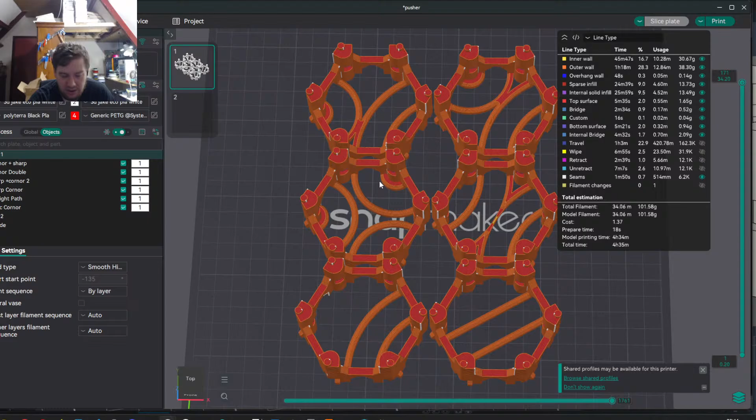And the lamp is now live. I'm still bloody nervous about it. I'm still like, what if everything goes wrong. But I did my best, and I will try my best to keep it going.

Yeah, I'm not tired at all. Alright, so let's select all the pieces that we now upgraded.

Let's get it to Polyterra Black. Wait, what? Huh? This is 3D Jake, oh that's why blue was bad. 3D Jake white, because I don't have black, so that should be fine.

Okay, so yeah, you can no longer say 'when is lamp.' Herschel's probably said about it too. He cannot say 'when is lamp,' because the lamp is now live.

It feels good. I'm excited for all the people that will buy it and assemble it. I'm super excited to see it all. It's gonna be scary, because I'm still nervous, like it's not good, it's not good. Someone's gonna find a huge problem that I didn't see. Welcome to designer stress, it's awesome.

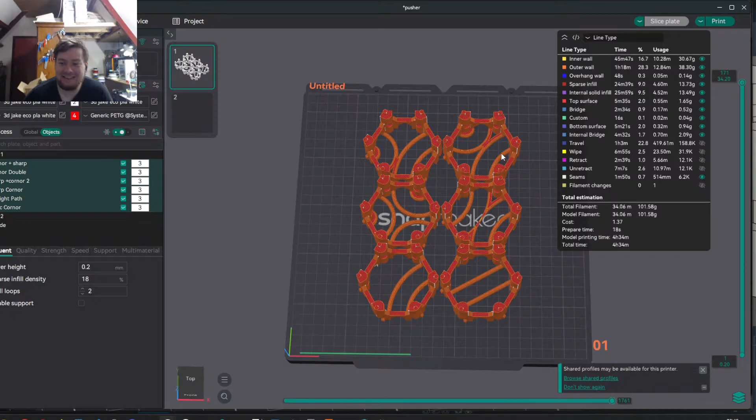Alright, so this is 4 hours. It's gonna print, let's go. Upload and print. Okay, so this one is gonna print.

I'm gonna end the stream because my sugar is still not good. Bad part of being diabetic. I've now talked for 2 hours and 45 minutes, or 2.5 hours. My throat is getting dry.

I'm excited to make more projects like the lamp and the marble contraption. Like, as I said in the start,

I went to a furry event, which was very bloody cool, and I really want to puzzle out my own fursuit, just to see how you can craft it and make RGB LEDs in them, because I do everything with electronics. Why not a fursuit? It's bloody hell, let's try it.

Oh, you have an error. Oh, you have an error. Try again.

Tool head 1, attach - no. Detach - no. Okay, printer is stuck. I need to restart, I need to restart. Okay, anyway, that needs a reboot, which is sad.